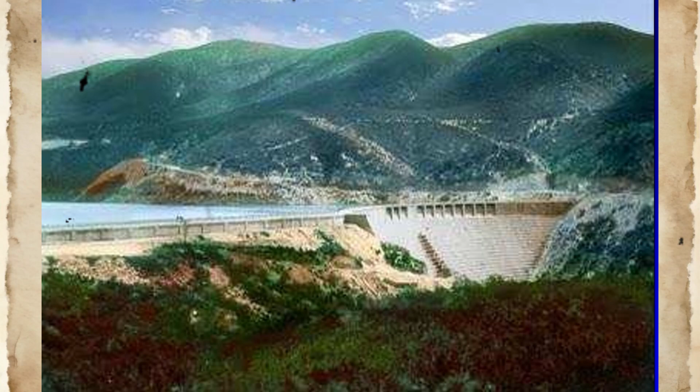The St. Francis Dam was conceived and executed within a specific institutional and technical context that shaped every subsequent decision. Between 1905 and 1913, the city of Los Angeles had constructed the Los Angeles Aqueduct, a 375-kilometer conveyance system designed to transport approximately 12 cubic meters per second of water from the Owens River drainage on the eastern slopes of the Sierra Nevada to the San Fernando Valley.

This system was designed, constructed, and administered by the Los Angeles Bureau of Waterworks and Aqueduct under the direction of William Mulholland, who served as chief engineer. Mulholland had begun his career in 1877 as a laborer maintaining water distribution canals and had risen through the organization without formal engineering education, relying instead on direct observation, technical reading, and accumulated operational experience. By 1924, Mulholland was recognized as the principal architect of Los Angeles's water infrastructure and wielded substantial autonomy in project conception, site selection, and design approval.

The St. Francis Dam was authorized as a storage facility to provide operational flexibility in the aqueduct system and to serve as a reserve supply during periods of peak demand or reduced inflow. The site selected was located in San Francisquito Canyon, a tributary valley to the Santa Clara River, approximately 64 kilometers northwest of downtown Los Angeles and 80 kilometers from the primary Van Norman Reservoir complex in the northern suburbs.

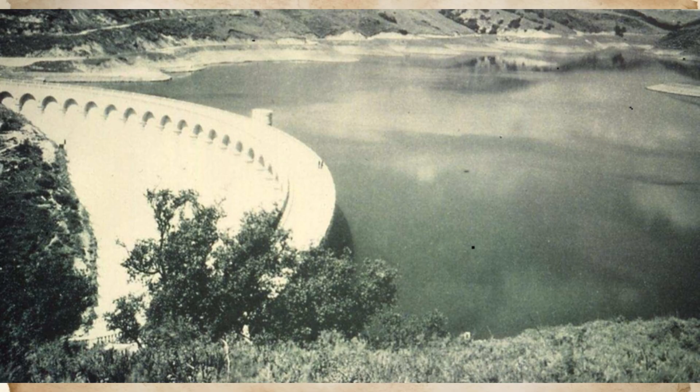Modern understanding of uplift pressure in dam foundations recognizes that hydrostatic pressure from an impounded reservoir can be transmitted through interconnected fractures, bedding planes, and cleavage surfaces in foundation rock, creating an upward force that reduces the effective weight of the dam and thereby reduces resistance to sliding and overturning.

By 1912, published literature on dam design had documented this phenomenon and had identified foundation drainage as a critical safeguard. The failure of the Austin Dam in Pennsylvania in 1911 had been attributed in part to inadequate control of uplift pressure. These precedents were apparently not incorporated into the design approach adopted for the St. Francis Dam.

The geology of the dam site was characterized by the presence of two distinct lithologic units. The western abutment and foundation consisted of the Vasquez conglomerate, a Paleogene sedimentary formation composed of poorly cemented cobbles and boulders in a matrix of clay-rich sand and silt. The eastern abutment and a portion of the central foundation consisted of the Pelona schist, a Cretaceous metamorphic rock characterized by well-developed foliation and pervasive micaceous mineralogy.

These two units were juxtaposed along the San Francisquito Fault, a northeast trending structure whose surface trace passed directly through the dam site beneath the western portion of the dam. The fault was marked by a zone of gouge and brecciated rock more than 1 meter wide, flanked by zones of intensely fractured and veined material.

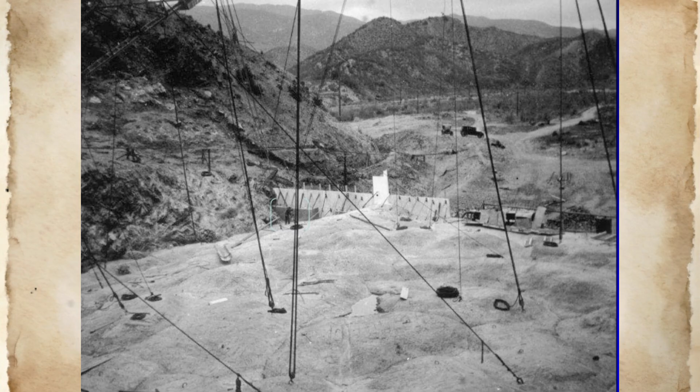The placement of a large concrete structure at the base of the slope, combined with saturation of foundation rock and introduction of hydrostatic pressure from an adjacent reservoir, constituted precisely such an alteration. The potential for reactivation of these latent slip surfaces was not evaluated prior to construction, as no detailed geological investigation of the site was conducted.

The design philosophy that guided construction of the St. Francis Dam was one of empirical precedent and conservative proportioning rather than rigorous analytical calculation. Mulholland and his design staff did not perform detailed stress analyses of the dam cross-section, load distribution on the foundation, or stability calculations incorporating realistic material properties and loading conditions.

The dam's geometry was instead based on visual similarity to the Hollywood Dam, adjusted for the greater height required at the St. Francis site. This approach was not unusual for the period, particularly for relatively small dams constructed under the authority of municipal agencies. However, it presupposed that site conditions at St. Francis would be comparable to those at Hollywood, an assumption that was not verified.

The absence of formal design calculations meant that there was no quantitative basis for assessing the adequacy of the dam's proportions, the significance of the height increase implemented during construction, or the sensitivity of stability margins to variations in foundation properties, uplift pressure, or material strength.

The institutional context in which the St. Francis Dam was designed and constructed was characterized by minimal external oversight. At the time of construction, California law exempted municipal water agencies from state-level review of dam design and construction. The Division of Water Rights, the state agency responsible for dam safety, had no jurisdiction over projects undertaken by cities or special districts.

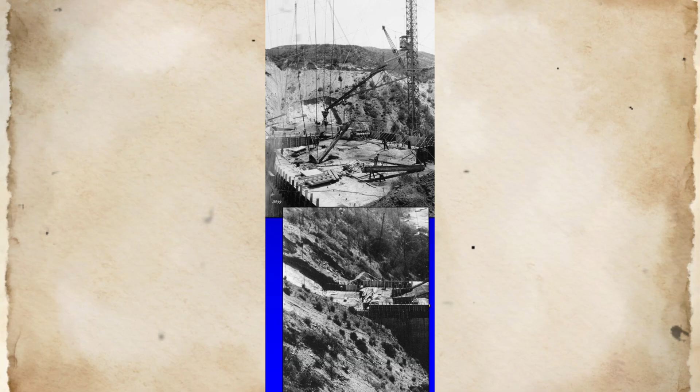Consequently, the St. Francis Dam was not subject to independent technical review by engineers or geologists outside the Los Angeles Bureau of Water Works and Aqueduct. There was no requirement for formal design documentation, no mandate for geological investigation, and no mechanism for third-party verification of construction quality or conformance to design intent.

Mulholland's authority within the Bureau was effectively absolute. The Board of Commissioners that governed the agency consisted of appointed officials with no technical training, who deferred to Mulholland's judgment on all engineering matters. This concentration of authority in a single individual, operating without formal accountability or technical review, created conditions in which judgments based on incomplete information, untested assumptions, or personal confidence could be implemented without challenge.

The operating philosophy for the reservoir once construction was complete was similarly informal. Responsibility for monitoring the dam's condition was assigned to a resident dam keeper, whose duties included visual inspection of the structure and observation of seepage flows. No formal inspection protocol was established, no quantitative criteria were defined for evaluating observed conditions, and no escalation procedure existed for anomalies that might warrant further investigation.

The assumption was that any significant distress in the dam or foundation would manifest as visually obvious cracking, deformation, or leakage that would be self-evident to an attentive observer. This assumption rested on the expectation that the dam and foundation would behave in a predictable manner consistent with the designer's conceptual model of the structure. It did not account for the possibility that observed conditions, such as seepage flows, minor cracking, or localized settlement, might be symptomatic of progressive failure mechanisms not anticipated in that conceptual model.

Reservoir filling commenced in March 1926, when aqueduct water was first diverted into the reservoir basin. The reservoir level rose gradually as water accumulated, with interruptions corresponding to periods of reduced aqueduct flow or increased downstream demand. During this period, vertical shrinkage cracks developed in the downstream face of the dam. Such cracks are common in mass concrete gravity dams, resulting from thermal contraction as the interior of the concrete mass cools following hydration of cement.

These cracks typically extend from the exposed surface into the dam, propagating along planes of least tensile resistance. In an unreinforced monolithic structure like the St. Francis Dam, such cracks would be expected to develop along approximately radial and vertical planes in the central valley section, and along inclined radial planes in the abutment sections. The presence of these cracks was noted during routine inspections, but was not regarded as indicative of structural distress. This interpretation was consistent with contemporary understanding of mass concrete behavior and was not unreasonable given the limited information available.

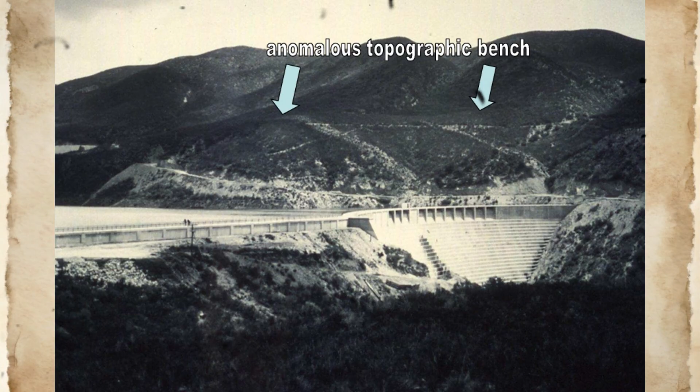By April 1926, the reservoir level had risen to the elevation of the fault trace where it crossed the foundation beneath the dam. Seepage was observed emerging from the western abutment in the vicinity of the fault outcrop. This seepage was attributed to flow through the fault gouge and adjacent fractured rock. The flow rate was estimated as modest and was judged to be within acceptable limits for a structure of this type. No corrective measures were undertaken.

Over the following months, various minor leaks were observed at different locations along the dam's downstream face and abutment contacts. These leaks exhibited variations in flow rate corresponding to changes in reservoir level and to seasonal temperature variations affecting concrete expansion and contraction.

None of the observed leakage flows were regarded as sufficiently anomalous to warrant detailed investigation or remedial action. The interpretation framework applied to these observations was one in which seepage through and beneath dams was expected, provided that flow rates remained stable and no significant erosion or piping was evident.

On March 7, 1928, the reservoir reached spillway elevation for the first time, achieving its maximum design storage capacity of approximately 38,000 acre-feet. In the week preceding this date, inspections had noted an increase in seepage flow from several locations in the western abutment. These flows were turbid, indicating that the percolating water was transporting fine-grained sediment.

Turbid seepage is a potential indicator of internal erosion or piping within the foundation or embankment material, a mechanism that can lead to progressive enlargement of seepage channels and eventual structural failure. However, in the context of the St. Francis Dam, a concrete structure founded on rock, rather than an earthfill embankment, turbidity was attributed to surface erosion of weathered rock or soil materials rather than subsurface piping. This interpretation was consistent with the expectation that seepage through rock foundations would follow discrete fractures or bedding planes, rather than developing self-enlarging erosion channels as in soil.

On the morning of March 12, 1928, the dam keeper discovered a new leak in the western abutment, discharging muddy water at an estimated rate of approximately 75 liters per second. He immediately notified Mulholland, who arrived at the site later that morning accompanied by Harvey Van Norman, his assistant. They inspected the leak and observed that the flow exhibited periodic surging, a pattern of alternating higher and lower discharge rather than steady flow.

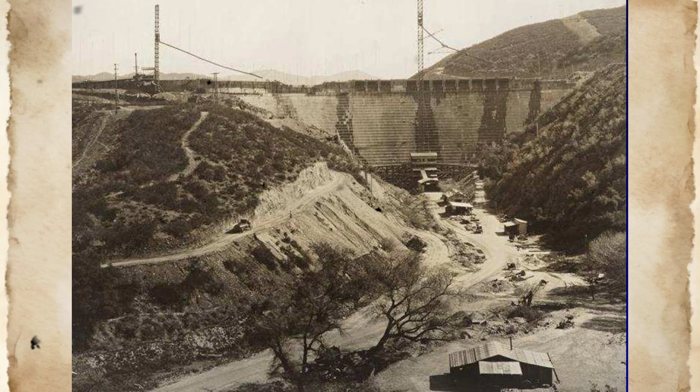The judgment rendered by Mulholland on the morning of March 12 was based on his interpretation of the observed conditions within the framework of his accumulated experience and his conceptual understanding of how the dam and foundation should behave. He had inspected numerous dams and water structures over his career and had developed intuitive criteria for distinguishing normal operational conditions from indicators of distress. The seepage flow observed on March 12, while larger and more turbid than previous flows, did not exceed the bounds of what Mulholland considered plausible for a structure of this type at full reservoir.

The surging of the flow, rather than being interpreted as evidence of subsurface erosion or structural movement, was rationalized as a transient hydraulic phenomenon. This interpretation was not implausible given the information available. However, it was predicated on the assumption that the foundation materials were behaving in a stable and predictable manner, an assumption that was, by that time, no longer valid.

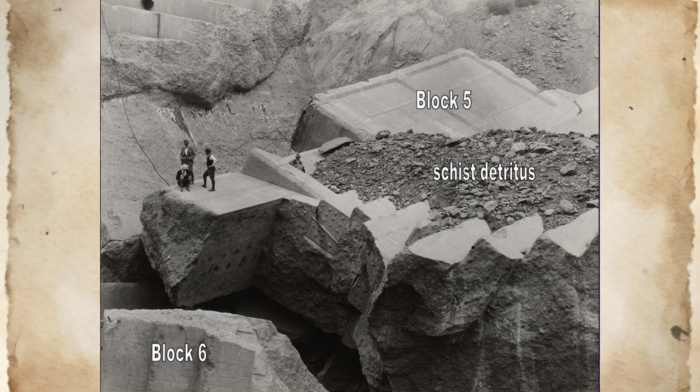At approximately 8:30 p.m. on March 12, a family driving on the canyon road that passed above the eastern abutment of the dam encountered a section of roadway that had subsided approximately 30 centimeters, creating a distinct step across the road width. The road at this location was situated approximately 30 meters upstream of the dam crest, on a slope composed of Pelona schist. The subsidence indicated that a portion of the hillside had moved downward and outward toward the reservoir. This movement was consistent with incipient landsliding along foliation planes within the schist, driven by reduced shear resistance due to elevated pore pressures in the rock mass.

The family did not immediately report the road damage, and news of the incident did not reach dam operating personnel until after the dam had failed. However, the timing of the observed subsidence, approximately 3 hours before the final collapse, indicates that large-scale deformation of the eastern abutment was already underway by early evening on March 12.

The St. Francis Dam failed at 11:57:30 p.m. on March 12, 1928. The precise timing is established by the recorded failure of an electrical transmission line supported on the eastern abutment, which caused a logged interruption at a downstream substation. Within seconds of this initial failure, the dam underwent progressive collapse in which the eastern and western wings of the structure were displaced downstream and destroyed, while a central section of the dam, subsequently termed the tombstone, remained standing. The failure released the entire reservoir volume in a period estimated at 70 minutes, generating a flood wave that propagated downstream through San Francisquito Canyon, into the Santa Clara River Valley, and ultimately to the Pacific Ocean.

The flood caused extensive destruction of infrastructure and agricultural land and resulted in at least 432 confirmed fatalities, with some estimates suggesting a higher toll. The failure of the St. Francis Dam constituted the deadliest civil engineering disaster in 20th century United States history and precipitated immediate scrutiny of the design, construction, and operational practices that had permitted such a catastrophic failure to occur.

The question that must be addressed in any forensic analysis of this failure is not merely what physical processes caused the dam to collapse, but why those processes were not anticipated, why warning signs were not interpreted correctly, and why the design and institutional framework permitted a structure of this type to be constructed and operated at this site.

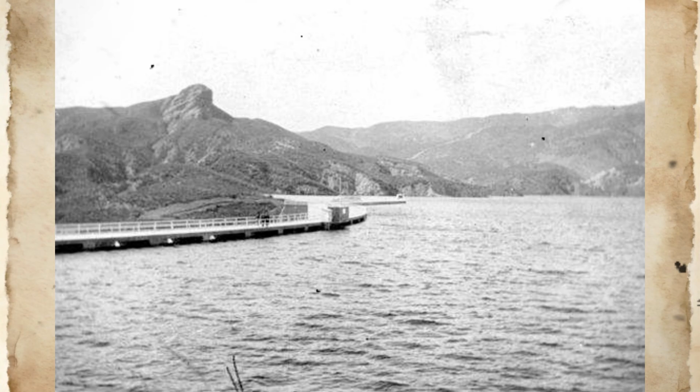Understanding these latent conditions requires examining not only the physical characteristics of the dam and its foundation, but also the cognitive frameworks, institutional norms, and professional practices that shaped how information was gathered, interpreted, and acted upon. The most fundamental latent condition was the absence of comprehensive geological investigation prior to site selection and design.

Standard practice in dam engineering, even in the 1920s, recognized that foundation geology constituted the primary determinant of site suitability, and that surface observations alone were insufficient to characterize subsurface conditions. Exploratory drilling, test pits, and detailed mapping of bedrock lithology, structure, and discontinuities were understood to be essential for evaluating bearing capacity, permeability, and potential failure modes.

However, no such investigation was conducted at the St. Francis site. The decision to construct the dam at this location was based on topographic convenience, the presence of a natural valley constriction suitable for a dam, proximity to the aqueduct alignment, and absence of existing development that would require land acquisition or relocation. Geological suitability was assessed only through visual inspection of surface exposures during site clearing operations.

This approach reflected a broader pattern in Mulholland's professional practice. His career had been built on pragmatic problem-solving and empirical judgment rather than formal analytical methods. He had successfully designed and constructed the Los Angeles Aqueduct, a project of considerable technical complexity, without formal engineering education and without reliance on outside consultants. This success reinforced a belief that direct observation, accumulated experience, and sound practical judgment were sufficient for making engineering decisions.

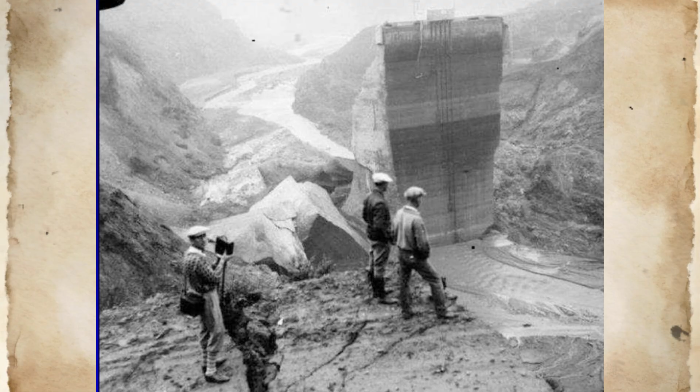A 1911 report prepared by the Bureau's own staff during route selection for the Los Angeles Aqueduct had explicitly identified the Pelona schist along the eastern wall of San Francisquito Canyon as unstable fractured material that should be avoided. This report was filed within the Bureau's records, but was apparently not consulted when the dam site was selected 13 years later. The omission is significant not because the earlier report specifically addressed the dam site, it did not, but because it demonstrates that relevant geological information existed within the organization's institutional memory and was not retrieved or applied when needed.

The presence of the San Francisquito Fault beneath the dam site was similarly documented in publicly available geological maps but was not incorporated into site evaluation. The fault had been mapped by the United States Geological Survey and was shown on regional geological compilations available prior to 1924.

Consultation of these maps during site selection would have revealed the fault's presence and should have prompted further investigation of fault zone characteristics, potential for seismic activity, and implications for foundation, permeability, and stability. However, geological maps were not routinely consulted by civil engineers in municipal water agencies during this period, particularly when those engineers lacked formal training in geology.

The conceptual framework within which Mulholland operated did not include geological structure as a primary design consideration. His focus was on topography, hydraulics, and concrete proportioning, domains in which he had extensive practical knowledge. Geology was regarded as a secondary concern, relevant primarily to the extent that obviously unsuitable materials such as loose soil or heavily weathered rock could be identified and excavated.

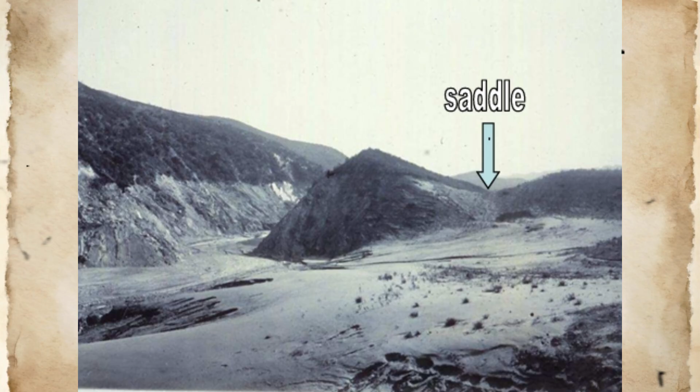When the inclined components of stress, due to the dam's geometry, and the lateral thrust from arch action are included, the total stress magnitude in the foundation approached or exceeded the material's strength capacity. Progressive yielding of the conglomerate beneath the dam would produce differential settlement, with greatest deformation occurring where stresses were highest, specifically in the upper portions of the western abutment, where the dam was tallest and where the conglomerate thickness was greatest. This differential settlement would induce additional stresses in the dam structure itself.

A monolithic concrete dam founded on yielding material experiences internal tensile stresses as different portions of the structure settle by different amounts. These tensile stresses would be concentrated in regions where settlement gradients were steepest, typically at the boundaries between competent and incompetent foundation materials or at geometric discontinuities in the structure. In the case of the St. Francis Dam, such boundaries existed at the contact between conglomerate and schist near the center of the dam and at the transition between the main dam and the western wing wall.

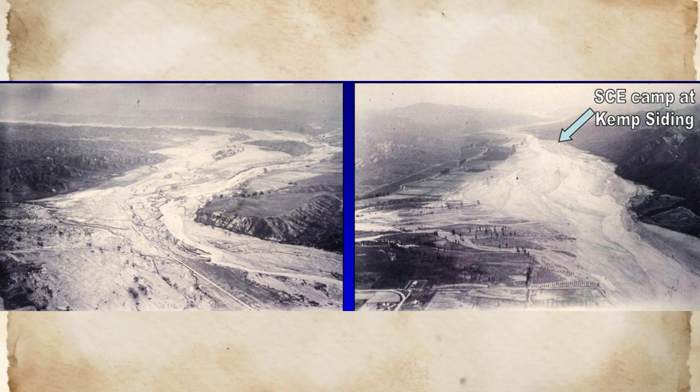In the absence of a deep cut-off wall or grout curtain to impede flow, and in the absence of relief wells or drainage galleries to dissipate pressure, the uplift pressure distribution beneath a dam may approach the full hydrostatic head of the reservoir. The mechanical consequence of uplift pressure is a reduction in the effective weight of the dam, which in turn reduces resistance to sliding and overturning. The factor of safety against sliding, defined as the ratio of resisting forces to driving forces, is directly proportional to the effective normal force acting on the foundation contact. If uplift pressure increases, the effective normal force decreases, and the factor of safety decreases correspondingly.

For the St. Francis Dam, the absence of foundation drainage beneath the eastern and western abutments meant that uplift pressure in these regions could develop to magnitudes comparable to the reservoir head. Mulholland's statement that he considered drainage unnecessary where bedrock appeared homogeneous indicates that he did not recognize the significance of uplift pressure in fractured or foliated rock masses. This judgment was inconsistent with contemporary engineering literature and with the documented experience of other dam failures attributed to uplift.

The eastern abutment presented a distinct set of latent conditions related to the orientation and mechanical properties of the Pelona schist. The schist's foliation dipped out of the hillside at angles between 30 and 50 degrees, creating planes of weakness that were approximately parallel to the slope surface.

The shear strength available along these foliation planes was controlled by friction and by the limited cohesion provided by intact rock bridges between discontinuities. Under natural conditions, with no external loading, and with groundwater levels relatively deep due to the semi-arid climate, the hillside was stable.

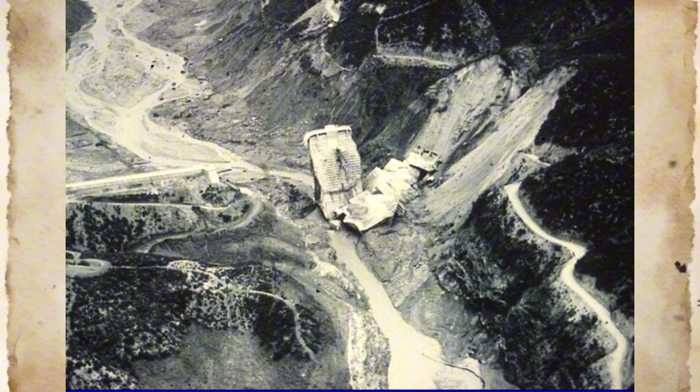Geological investigation conducted after the dam failure identified multiple relict slip surfaces within the eastern abutment, indicating that prehistoric landslides had occurred in this location. The morphology of these features suggested that they were deep-seated rotational or translational slides that had moved along foliation planes and had subsequently stabilized under natural conditions. The presence of these features was not unique to the St. Francis site. Similar ancient landslides were identified along much of the eastern slope of San Francisquito Canyon during post-failure reconnaissance.

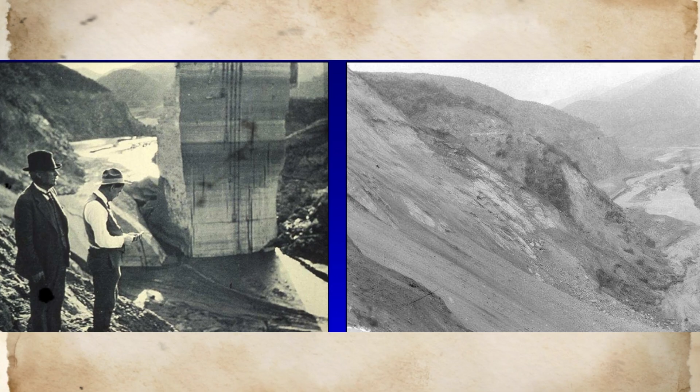However, their presence at the dam site was significant because it indicated that the hillside was inherently susceptible to renewed movement if the factors controlling stability, effective stress, pore pressure, external loading were altered. The placement of a large concrete structure at the toe of the slope, combined with saturation from an adjacent reservoir, constituted precisely such an alteration.

The design of the St. Francis Dam did not incorporate any factor of safety margin to account for uncertainty in material properties, loading conditions, or construction quality. The dam's proportions were based on empirical precedent rather than analytical calculation, and no formal stability analysis was performed to verify adequacy under credible loading scenarios. This absence of quantitative analysis meant that there was no documented basis for the dam's safety margins or lack thereof.

Contemporary practice in dam engineering recognized that factors of safety should be explicitly calculated and should exceed minimum threshold values to account for uncertainties and potential deviations from design assumptions. Typical minimum factors of safety for gravity dams were 2 against sliding and 1.5 against overturning, based on assumed loading conditions that included full reservoir, uplift pressure, and earthquake forces where applicable. Whether the St. Francis Dam met these criteria could not be determined without analysis, and no such analysis was performed.

The increase in dam height implemented during construction further reduced whatever safety margins may have existed in the original design. Raising the crest by 6 meters increased the reservoir storage capacity and the hydrostatic force acting on the dam, but did not increase the dam's base width or otherwise enhance its resistance to sliding or overturning. The effect was to increase the driving forces while leaving the resisting forces unchanged, thereby decreasing the factor of safety. If the original design had been marginally adequate, the modified design would be inadequate. If the original design had included appropriate safety margins, those margins would be partially consumed by the modification.

The decision to increase the dam height without corresponding structural adjustments reflects either an implicit assumption that the original design had been highly conservative, an assumption that could not be verified without calculation, or an insufficient appreciation of how changes in geometry affect structural stability.

Photographic evidence from the construction period, analyzed after the failure, suggested that the actual extent of the dam's downstream toe may have been less than the design dimension. If the concrete pour did not extend to the intended limits, the effective base width of the dam would be reduced, further compromising stability. This discrepancy, if real, would represent a construction deficiency that should have been identified through survey and quality control procedures. However, the Bureau's construction practices during this period did not emphasize formal documentation or independent inspection.

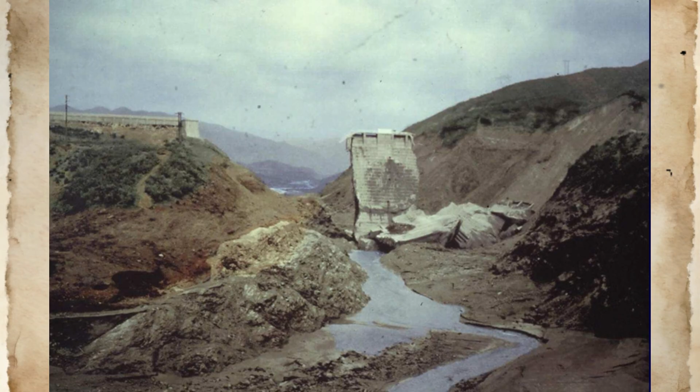Responsibility for verifying conformance to design rested primarily with the resident construction supervisor, who reported directly to Mulholland. There was no independent quality assurance function within the organization and no external oversight by state or federal agencies. Under these conditions, deviations from design could occur without detection or correction.

The dam's monolithic construction without contraction joints or other provisions for accommodating differential movement created a structural system with limited redundancy and no capacity for stress redistribution. In a jointed dam, individual blocks can move slightly relative to one another in response to foundation settlement or thermal expansion, without inducing large tensile stresses in the concrete. Joints also provide known planes of weakness that can accommodate cracking in a controlled manner. In a monolithic dam, all deformations must be absorbed by the concrete itself, and cracks develop along planes of least resistance determined by local stress concentrations, material heterogeneities, and thermal gradients.

Once formed, these cracks cannot close completely even if external loads are removed, because rough crack surfaces interlock and because some irreversible deformation occurs in the surrounding concrete. The result is a structure that, while appearing intact from external observation, consists internally of multiple blocks separated by partial or complete fractures. The mechanical behavior of such a structure under load is fundamentally different from that of a true monolith. But this difference is difficult to quantify without detailed knowledge of crack locations, orientations, and degrees of separation.

The alarm system and monitoring protocols in place at the St. Francis Dam were minimal. The dam keeper was responsible for daily visual inspection of the structure and for noting any unusual conditions such as new cracks, changes in seepage flow, or structural deformation. However, there were no instruments installed to measure concrete strain, foundation movement, seepage quantity, or uplift pressure. The dam keeper had no technical training in structural engineering or dam safety and had no formal criteria for evaluating whether observed conditions were within acceptable limits.

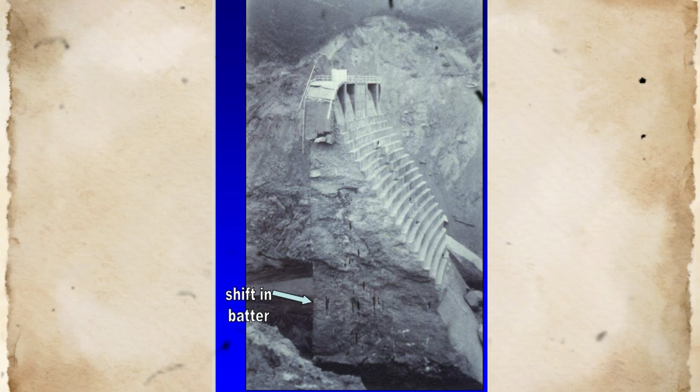This regulatory gap was not unique to California. Similar exemptions existed in other states and reflected a broader assumption that governmental agencies could be trusted to self-regulate. The St. Francis failure demonstrated the fallacy of this assumption and prompted immediate legislative changes to eliminate such exemptions. The training and professional development of dam operators and inspection personnel during this period did not emphasize recognition of incipient failure modes or interpretation of warning signs. The dam keeper at St.

Francis had operational responsibilities but no formal education in civil engineering, structural mechanics, or dam safety. His understanding of what constituted normal versus abnormal behavior was based on informal guidance from supervisors and on his own observations over time. This knowledge was largely qualitative and comparative. A condition was judged normal if it resembled conditions previously observed, and abnormal if it represented a significant departure.

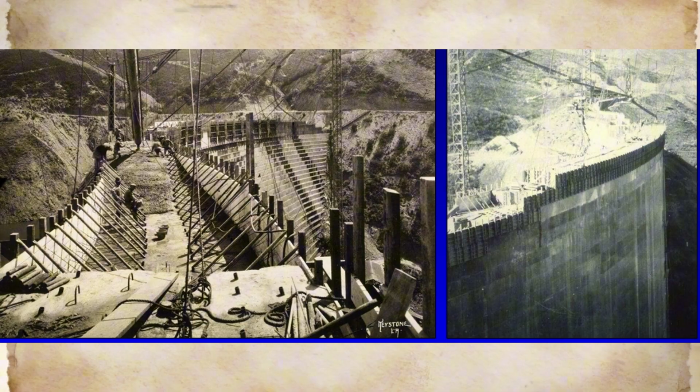However, this approach provided no framework for recognizing progressive deterioration or for distinguishing between benign variations and indicators of impending failure. The dam keeper's observation of muddy seepage and surging flow on the morning of March 12 was reported to Mulholland, but neither the dam keeper nor Mulholland interpreted these signs as indicators of imminent structural collapse. The interpretive framework available to them did not include a mental model of how subsurface erosion in weak conglomerate or progressive landslide movement in foliated schist might manifest at the surface.

The concept of progressive failure, wherein a structure or foundation gradually loses strength or stability through a sequence of incremental damage events, was not well developed in dam engineering practice of the 1920s. Failures were generally conceptualized as resulting from overload, a flood exceeding spillway capacity, an earthquake exceeding design seismic resistance, or a sudden foundation collapse due to previously undetected voids.

The possibility that a dam could fail under normal operating conditions due to gradual deterioration of foundation material or cumulative loss of structural integrity was less widely recognized. This conceptual gap meant that warning signs of progressive failure, such as increasing seepage, turbidity, or localized deformation, might be rationalized as transient anomalies rather than interpreted as evidence of an ongoing failure process.

The physical configuration of the dam site itself contributed to the latent failure conditions. The narrowness of the valley and the presence of the natural spur on the western side created a geometrically constrained site in which the dam had to accommodate significant variations in foundation elevation and material properties over a relatively short horizontal distance. The central portion of the dam rested on schist at relatively low elevation, while the western wing extended up the conglomerate slope to maintain a continuous crest.

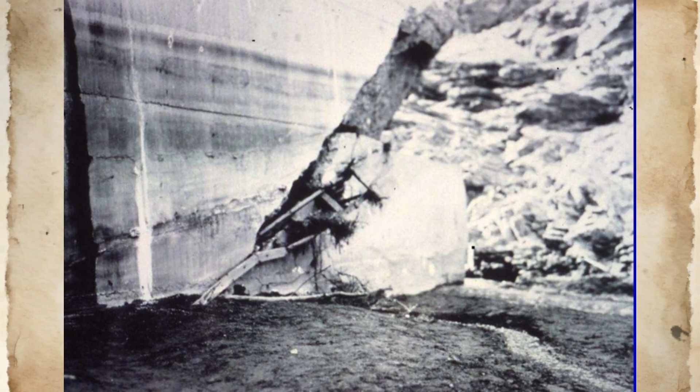The decision to construct a concrete gravity dam rather than an alternative design such as an earth or rockfill embankment reflected a preference for concrete construction that was widespread in the early 20th century. Concrete dams were perceived as more permanent, more controllable during construction, and less susceptible to erosion or piping than earthfill dams. However, concrete dams impose much higher bearing stresses on foundation materials than embankment dams of equivalent height, and they are less tolerant of foundation deformation.

An earthfill dam can accommodate moderate differential settlement through internal adjustment of the fill material, whereas a concrete dam subjected to differential settlement develops cracks and internal stress concentrations. For a site with weak or variable foundation conditions, an embankment design might have been more appropriate. The choice of a concrete gravity design presupposed that the foundation was competent and uniform, an assumption that was not verified at St. Francis.

The schedule pressures and resource constraints under which the dam was designed and constructed also constituted latent conditions. The Los Angeles water system was under continuous demand for expansion to serve the city's rapidly growing population. New storage capacity was needed urgently, and delays in project delivery were viewed as impediments to the city's economic development. This urgency created an organizational bias toward rapid decision-making and abbreviated planning processes. Comprehensive site investigation, detailed design analysis, and extended construction schedules were seen as costly and time-consuming.

The institutional incentive structure rewarded timely project completion and cost control rather than thoroughness of design or conservatism of safety margins. Under these conditions, decisions tended to favor expedience over exhaustive analysis, and judgments were made with less information than would be ideal, but with sufficient information to appear reasonable at the time.

The cumulative effect of these latent conditions was to create a socio-technical system in which failure was not inevitable in the deterministic sense, but was highly probable given the combination of weak foundation materials, inadequate design provisions, absence of external review, concentration of decision authority, and limited capacity for detecting and interpreting warning signs. No single condition was sufficient to cause failure. The conglomerate alone, or the schist alone, or the fault alone, or the inadequate drainage alone, might have been manageable if other aspects of the design and oversight system had been robust.

However, when multiple latent conditions align, when weak materials coincide with inadequate analysis, when organizational culture discourages critical review, when regulatory oversight is absent, and when warning signs are misinterpreted, the probability of catastrophic failure increases dramatically. The St. Francis Dam was a system configured for failure, awaiting only the final triggering conditions that would convert latent

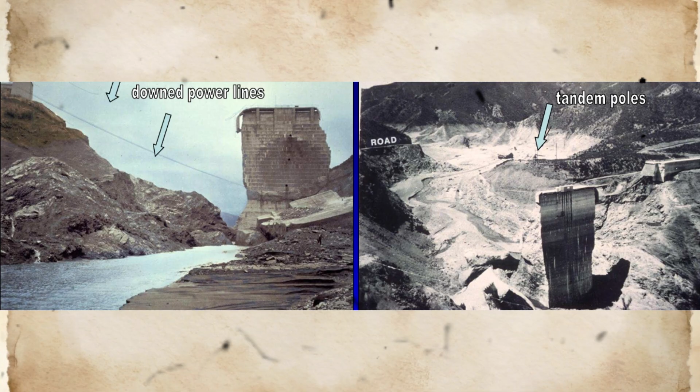vulnerability into manifest collapse. The transformation of latent vulnerability into active failure began not with a single catastrophic rupture, but through a sequence of progressive deterioration events that unfolded over days and hours preceding the final collapse. Understanding this progression requires reconstructing the state of the dam and foundation as the reservoir approached and reached its maximum designed capacity, identifying the physical processes that were initiated by full impoundment, and examining how these processes were interpreted or misinterpreted by those responsible for monitoring the structure.

The critical analytical challenge is to distinguish between what was observable at the time and what could be inferred from those observations given the conceptual frameworks and technical knowledge available to the observers. By March 7, 1928, the reservoir level had risen to spillway elevation for the first time since filling operations began in 1926. The reservoir now contained approximately 38,000 acre-feet of water, equivalent to a volume of roughly 47 million cubic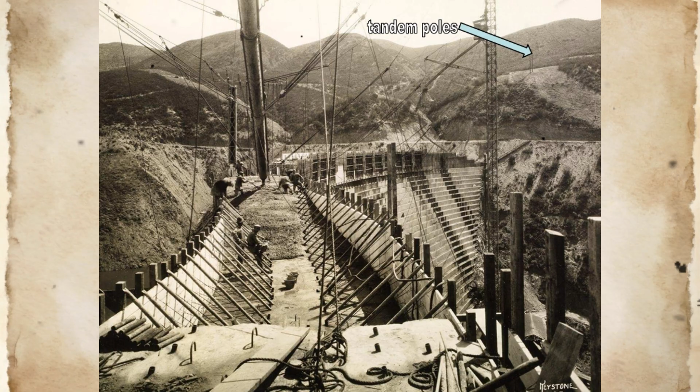This force was resisted by the dam's self-weight, by shear resistance along the foundation contact, and by any arch thrust that could be developed through bearing against the abutments. The attainment of full reservoir capacity marked a transition in the hydraulic and mechanical state of the foundation. Prior to this point, water infiltration into foundation rock had been limited to elevations below the instantaneous reservoir level, with the upper portions of the abutments remaining unsaturated.

With the reservoir at spillway level, water was now in direct contact with foundation rock across the full height of the dam, and hydrostatic pressure was being transmitted into fractures, bedding planes, and foliation surfaces throughout the foundation volume. The rate at which pore pressures within the foundation equilibrated with reservoir pressure depended on the permeability of the rock mass and on the connectivity of flow paths. For highly fractured or foliated rock with interconnected discontinuities, equilibration could occur within hours to days. For less permeable rock with isolated fractures, equilibration might require weeks to months.

The Pelona schist forming the eastern abutment and portion of the central foundation possessed moderate permeability along foliation planes and cross-cutting fractures, but low permeability across intact rock matrix. The foliation orientation dipping into the hillside at 30 to 50 degrees provided preferential flow paths that were approximately parallel to the slope surface. Water entering these foliation planes from the reservoir would migrate along the planes into the hillside, creating elevated pore pressures at depth.

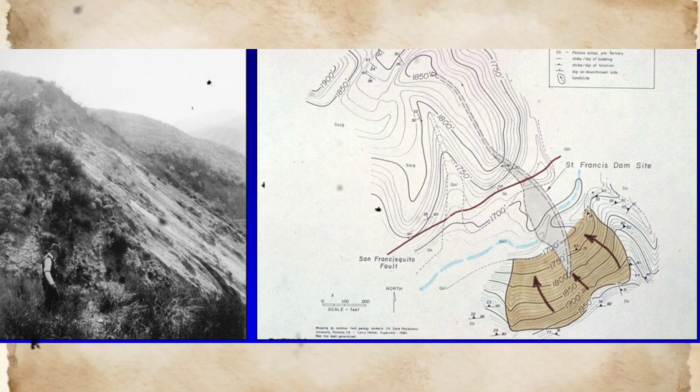The magnitude of pore pressure at any given point would depend on the hydraulic gradient between that point and the reservoir, and on the resistance to flow along the intervening path. In regions where foliation planes were continuous and open, pore pressures could approach the full hydrostatic head corresponding to the elevation difference between the reservoir surface and the point of interest. In regions where flow paths were constricted or discontinuous, pore pressures would be lower. The mechanical consequence of elevated pore pressure within the schist was a reduction in effective normal stress acting across foliation planes and other potential sliding surfaces.

Effective stress, defined as total stress minus pore pressure, controls the frictional resistance available to resist shearing. As pore pressure increases, effective stress decreases, and shear strength decreases proportionally. For a hillside that was marginally stable under natural conditions, the introduction of elevated pore pressures due to reservoir filling could reduce the factor of safety below unity, initiating slope movement. This movement would not necessarily be instantaneous or catastrophic. It could occur as slow creep or as episodic incremental displacements, particularly if the sliding mass encountered irregularities or intact rock bridges along the slip surface that temporarily arrested motion.

Evidence of such movement was documented on the evening of March 12 when the Sylve family encountered the broken roadway on the eastern abutment. The road's subsidence of approximately 30 centimeters indicated downward and outward displacement of a block of hillside schist. The location of this displacement, approximately 30 meters upstream of the dam crest, suggests that the sliding mass extended from near the reservoir shoreline down to the base of the dam or below.

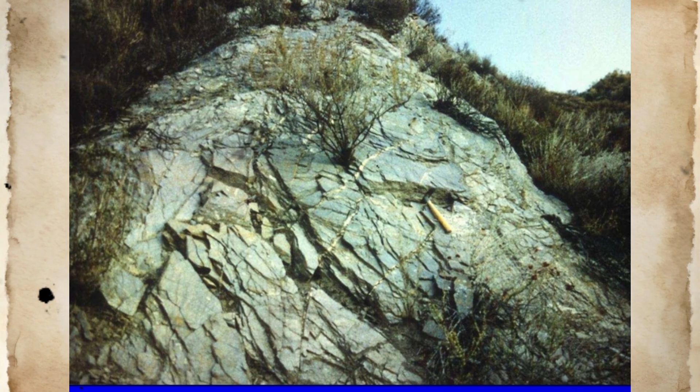The timing of the observed displacement, approximately 3 hours before the final collapse, indicates that large-scale deformation of the eastern abutment was actively underway by early evening on March 12. However, because this observation was not reported to dam operating personnel until after the failure had occurred, it did not influence real-time decision-making.

The Vasquez conglomerate forming the western abutment and foundation exhibited very different behavior under reservoir loading. The conglomerate's clay-rich matrix absorbed water readily, leading to swelling and progressive loss of strength. Gypsum veins within the conglomerate dissolved upon prolonged contact with percolating water, creating enlarged seepage paths and reducing the material's cohesion. The combined effects of saturation, swelling, and dissolution resulted in a gradual reduction in bearing capacity and an increase in deformability. Under the compressive stresses imposed by the dam, the saturated conglomerate underwent creep, time-dependent deformation at constant stress, and localized compression where stress concentrations were highest.

Seepage through the conglomerate had been observed from early in the reservoir filling process. Initial seepage flows were clear, indicating that water was moving through existing voids or fractures without mobilizing fine particles. As saturation progressed and the conglomerate matrix began to soften, seepage flows became turbid, indicating that fine-grained material was being transported in suspension. Turbidity in seepage is a recognized warning sign in dam safety because it indicates internal erosion, the progressive removal of material from within the structure or foundation.

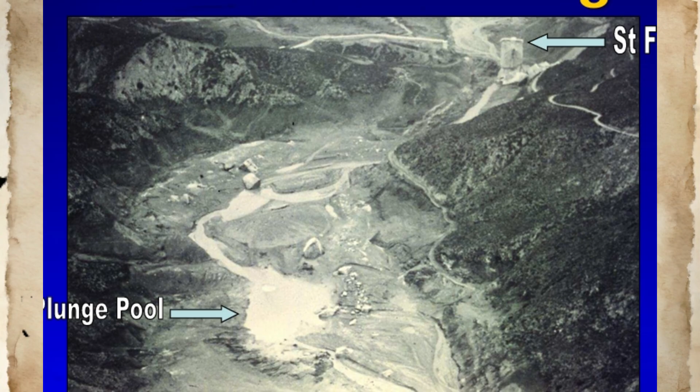If internal erosion continues unchecked, it can create enlarged flow channels that further accelerate erosion, eventually producing cavities or pipes that undermine structural support. However, the significance of turbidity depends on the context. In an earthfill embankment dam, turbid seepage is an immediate concern because it indicates active piping in the dam body or foundation. In a concrete dam founded on rock, turbidity was more commonly attributed to surface erosion of weathered rock or mobilization of sediment from pockets of loose material exposed during excavation.

During the week preceding March 12, multiple seepage flows were observed in the western abutment, several of which exhibited turbidity. These flows were reported to Mulholland and Van Norman, who inspected the dam on several occasions. Their interpretation was that the turbid water was likely draining from superficial materials or from seams of weathered conglomerate exposed on the downstream slope.

This interpretation was consistent with the expectation that the conglomerate, while weak, was not undergoing catastrophic internal erosion. It was also consistent with the broader assumption that the foundation, having been exposed during site clearing and visually inspected prior to concrete placement, was adequate to support the dam under design loading. The possibility that subsurface erosion was actively enlarging flow paths within the conglomerate, and that this process was progressively weakening the foundation, was not considered as a likely mechanism.

On the morning of March 12, the dam keeper discovered a new leak emerging from the western abutment. This leak was larger than previously observed seepage flows and was discharging visibly muddy water. The estimated flow rate of 75 liters per second, if accurate, represented a significant volume of seepage and implied the existence of a well-developed subsurface flow path with relatively high permeability. More concerning was the periodic surging of the flow, alternating periods of higher and lower discharge rather than steady flow.

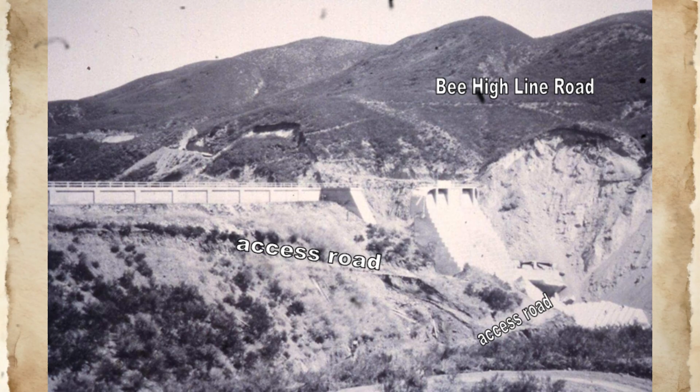The decision not to take immediate action in response to the March 12 observations, specifically, the decision not to lower the reservoir level as a precautionary measure, reflected a judgment that the risk of imminent failure was low. Lowering the reservoir would have required releasing water through the outlet works, reducing storage available for downstream delivery, and potentially creating operational difficulties if the reservoir could not be refilled promptly. These considerations were weighed against the perceived urgency of the observed conditions.

In Mulholland's assessment, the conditions warranted monitoring and future remedial work, but did not justify immediate emergency drawdown. This judgment was communicated to the dam keeper, who was instructed to continue normal operations and to report any further changes. Between noon on March 12 and the time of final collapse at approximately midnight, the physical processes that had been underway in the foundation continued and accelerated.

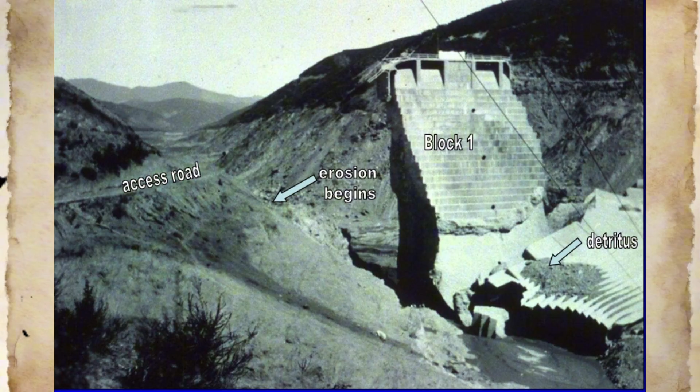Subsurface erosion within the conglomerate continued to enlarge flow paths and to remove support from beneath the western portion of the dam. Pore pressures within the schist of the eastern abutment continued to reduce effective stresses along foliation planes, bringing the hillside closer to or beyond the threshold of stability. The weight of the dam and the hydrostatic pressure of the reservoir continued to impose stresses on foundation materials that were progressively losing strength. At some point during this period, the balance of forces transitioned from a marginally stable configuration to an actively unstable configuration in which failure became inevitable.

The precise sequence of events during the hours immediately preceding collapse cannot be reconstructed with certainty because no witnesses observed the dam continuously during this period, and no instrumentation recorded the progression of failure. However, physical evidence examined after the failure, combined with analysis of failure mechanics, allows reconstruction of the probable sequence. The eastern abutment, already experiencing progressive landslide movement as evidenced by the road subsidence observed at 8:30 p.m., continued to deform under the combined effects of reduced shear resistance along foliation planes and increased loading from the reservoir.

This deformation may have been accelerating as the slope approached or exceeded the critical state for kinematic instability. Simultaneously, the western abutment was experiencing progressive yielding of the saturated conglomerate foundation, where the dam was tallest and the conglomerate thickness was greatest. Bearing stresses exceeded the material's saturated compressive strength, producing incremental settlement.

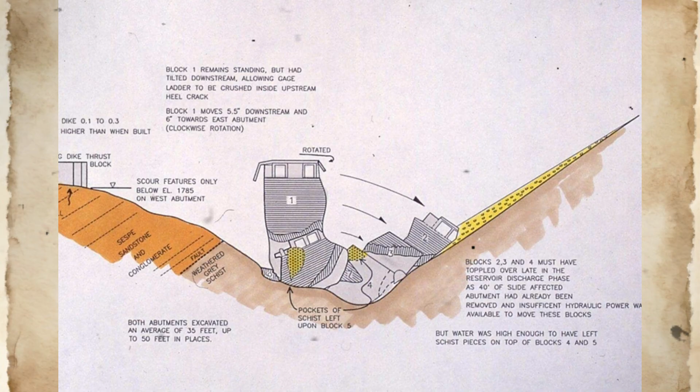This settlement was not uniform, but was concentrated in zones where the conglomerate was weakest, or where stress concentrations were highest. Differential settlement between adjacent portions of the dam would have induced tensile stresses in the concrete, potentially propagating existing shrinkage cracks or opening new fractures. As the integrity of the dam structure was progressively compromised by cracking, its ability to distribute loads and to resist deformation decreased.

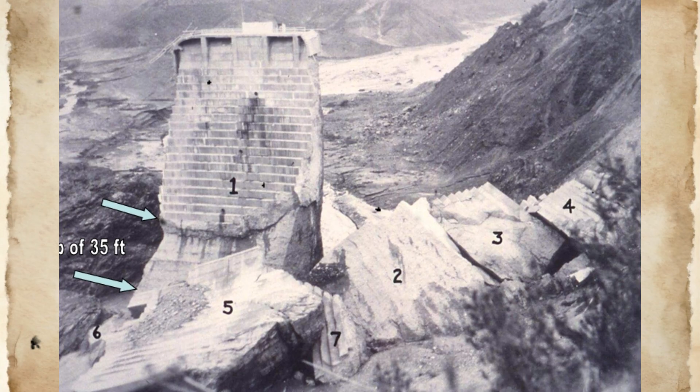The interaction between these two deteriorating conditions, progressive landslide movement on the east and progressive foundation yielding on the west, created a mechanically coupled system in which deformation in one location altered stress distributions in adjacent regions. As the eastern abutment moved outward and downward, support was removed from the eastern portion of the dam.

The dam structure, no longer fully restrained on the eastern side, experienced increased cantilever deflection and increased arch thrust toward the western abutment. This increased thrust, transmitted through the already cracked concrete, imposed additional loading on the western foundation, accelerating yielding and settlement. The result was a positive feedback loop. Deformation begat additional stress redistribution, which begat additional deformation.

At approximately 11:57:30 p.m. on March 12, this deterioration process reached a critical threshold. The precise trigger for final collapse, whether it was catastrophic failure of the eastern abutment landslide, sudden rupture of the dam structure along a major crack, or a combination of mechanisms, cannot be determined definitively. However, the evidence indicates that failure initiated in the eastern abutment.

The electrical transmission line supported on the eastern hillside above the dam failed at 11:57:30 p.m., as recorded by instrumentation at a downstream substation. This timing corresponds to the moment of initial major structural displacement. The failure of the transmission line indicates that the hillside was undergoing large-scale rapid movement, either as acceleration of the existing slow landslide or as sudden catastrophic collapse of the slope.

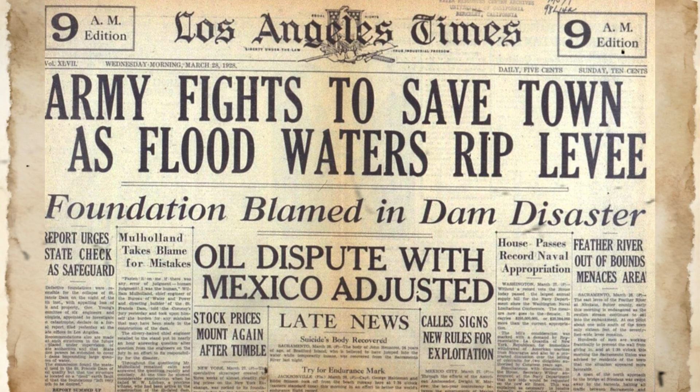The removal of support from the eastern end of the dam by the landslide would have immediately destabilized the eastern wing of the dam structure. The concrete blocks forming this section, no longer restrained by the adjacent hillside and subjected to full hydrostatic pressure from the reservoir, would have been thrust outward and downstream.

The loss of the eastern wing would have created a breach in the dam, allowing reservoir water to begin flowing out at high velocity. This outflow would have rapidly eroded the landslide debris and exposed foundation material at the base of the breach. However, the outflow at this stage would have been limited to the width of the breach and would have been constricted by the remaining central and western portions of the dam.

The central portion of the dam, the section that ultimately survived as the tombstone, was founded on schist at a lower elevation than the abutment sections and was provided with foundation drainage in the form of relief wells. This drainage, while limited, was apparently sufficient to control uplift pressures beneath this section to a degree adequate to maintain stability. However, the sudden removal of lateral support from the eastern side, combined with the dynamic loading from the initial outflow, subjected the tombstone section to forces for which it had not been designed.

Survey measurements conducted after the failure determined that the top of the tombstone had moved approximately 15 centimeters in a radial direction and a similar distance in an easterly tangential direction. These displacements indicate that the tombstone experienced both rotation and lateral translation during the failure sequence, but retained sufficient structural integrity and foundation support to avoid complete collapse.

Approximately 20 minutes after the initial failure of the eastern wing, based on analysis of flood wave timing and reservoir drainage rates, the western wing of the dam collapsed. This secondary collapse was likely triggered by a combination of mechanisms: increased downstream thrust from the partial breach flow, loss of confining stress from the now displaced central section, and final loss of bearing support as the saturated conglomerate yielded under increased loading. The collapse of the western wing created a second major breach, allowing reservoir water to discharge through both the eastern and western openings simultaneously.

The combined outflow capacity through these breaches was enormous, estimated at peak rates exceeding 500,000 cubic feet per second, equivalent to approximately 14,000 cubic meters per second. This flow rate is comparable to the peak discharge of the Mississippi River during major floods and far exceeds the outflow capacity of the dam's outlet works or spillway.

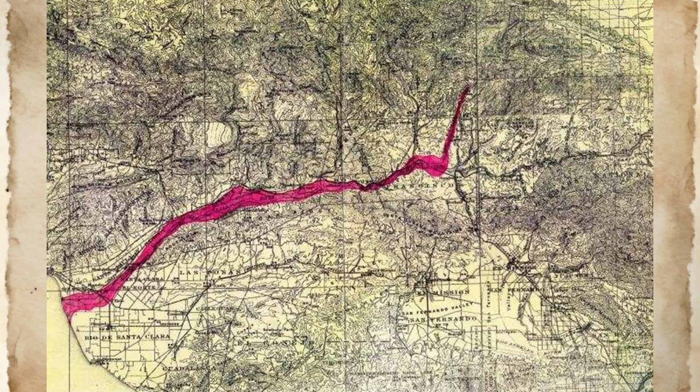The reservoir level dropped rapidly as this outflow continued, falling at rates exceeding 1 meter per minute during the peak discharge period. Within approximately 70 minutes of the initial failure, the reservoir had drained almost completely, leaving only residual pools in low-lying areas of the former reservoir basin.

The flood wave generated by this sudden release of water propagated downstream through San Francisquito Canyon at velocities estimated at 25 to 30 kilometers per hour. The wave height in the narrow upper canyon reached approximately 40 meters, measured from pre-flood ground surface to the peak water surface elevation indicated by scour marks and debris deposition on canyon walls.

As the wave advanced downstream and the valley widened, wave height decreased and wave width increased, with a total volume of water spreading laterally across the available floodplain. Witnesses in the town of Castaic, located approximately 8 kilometers downstream of the dam, reported hearing a rumbling sound beginning at approximately 12:45 a.m. on March 13th, followed shortly by the arrival of the flood wave, which destroyed most structures in the town.

Telephone warnings were successfully transmitted to communities further downstream, including Fillmore and Santa Paula, allowing many residents to evacuate to high ground before the flood wave arrived. In Fillmore, the wave arrived at approximately 3 a.m., and in Santa Paula at approximately 3:20 a.m. By this time, the wave had attenuated considerably due to spreading and energy dissipation, but it was still sufficient to cause extensive destruction of structures and infrastructure in the low-lying areas adjacent to the Santa Clara River.

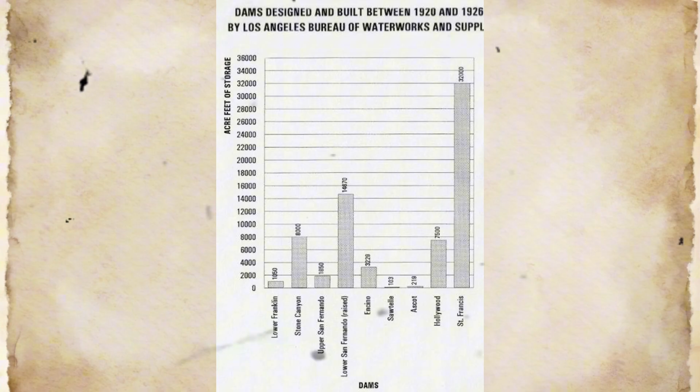The floodwave reached the Pacific Ocean at approximately 5:30 a.m., some 5 hours after the initial dam failure, by which time it had spread across several kilometers of width and had diminished to a depth of a few meters. The human toll of the St. Francis Dam failure was catastrophic.

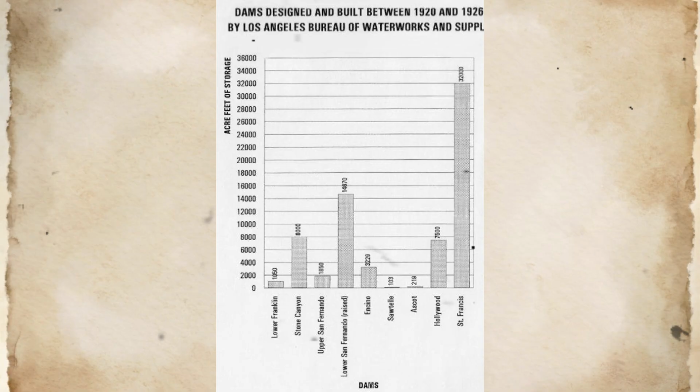The coroner's official count identified 432 confirmed fatalities, but this number was recognized as incomplete because some bodies were never recovered, having been swept out to sea or buried under debris. Demographic analysis and missing person reports suggested that the actual death toll may have exceeded 450.

The majority of fatalities occurred in the upper reaches of San Francisquito Canyon and in isolated ranches and work camps in the Santa Clara Valley, where residents received no warning and had no opportunity to escape. In the towns of Fillmore and Santa Paula, where telephone warnings allowed partial evacuation, casualties were substantially lower but still significant, particularly among those who did not hear the warnings or who were unable to reach high ground in time.

The material damage extended over more than 87 kilometers of valley length from the dam site to the ocean. Approximately 1,200 structures were destroyed, including houses, barns, agricultural buildings, and industrial facilities. Thousands of hectares of agricultural land were scoured or buried under debris. Multiple bridges, sections of highway and railroad infrastructure were destroyed.

The economic cost, estimated at the time as approximately $15 million in 1928 currency, corresponded to several hundred million dollars in present value. However, the economic impact extended beyond direct property damage to include lost agricultural production, costs of emergency response and recovery, and long-term disruption to regional development.

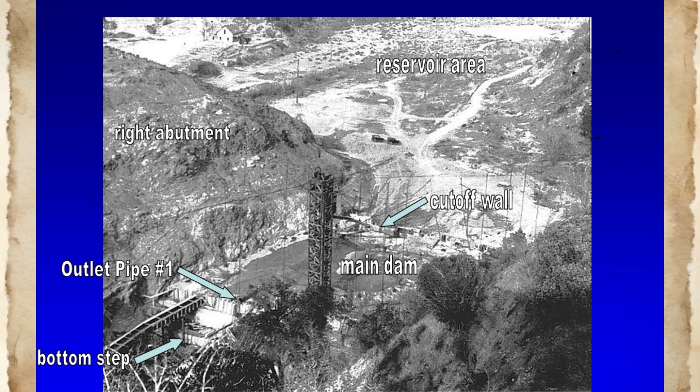A design process that included thorough geological investigation and rigorous stability analysis would have identified the unsuitability of the site or would have resulted in design modifications to address the identified hazards. An organizational culture that encouraged questioning of assumptions and solicitation of external expertise would have created opportunities for alternative interpretations to be considered. An institutional framework that required independent review would have provided a mechanism for identifying deficiencies before construction proceeded. Each of these safeguards was absent at St. Francis, and their collective absence made the failure probable.

The collapse of the St. Francis Dam was not a singular catastrophic event, but rather the terminal phase of a multi-mechanism failure chain in which distinct physical processes interacted, reinforced one another, and ultimately converged to produce total structural failure. Reconstructing this failure chain requires integrating evidence from post-failure site inspections, analysis of the final positions and conditions of dam fragments, examination of foundation surfaces exposed after the flood, laboratory testing of foundation materials, and application of mechanical principles governing dam stability, rock mass behavior, and progressive failure. The objective is to establish a causally complete sequence, to identify each critical link in the chain, to explain how one condition enabled or accelerated the next, and to define the point beyond which recovery was no longer possible.

The failure chain began not on March 12, but weeks earlier, when the reservoir first approached full capacity and water began to saturate foundation materials that had remained unsaturated throughout most of the filling period. The Vasquez conglomerate forming the western abutment and foundation was exposed to sustained wetting for the first time, as the reservoir level rose to spillway elevation. The conglomerate's response to saturation was governed by its mineralogical composition and microstructure. The matrix consisted predominantly of clay minerals, primarily montmorillonite and illite, with minor proportions of quartz, feldspar, and calcite.

For the St. Francis Dam, the differential settlement beneath the western abutment would have induced tensile stresses in the upstream face of the dam in this region, promoting crack propagation from the water face into the interior of the structure. These cracks, once formed, provided pathways for reservoir water to penetrate into the dam. Water pressure within cracks exerts a wedging force that tends to open the cracks further, a phenomenon known as hydraulic fracturing. The progression is self-reinforcing. Settlement causes cracking. Cracking allows water penetration, water pressure widens cracks, and widened cracks facilitate additional settlement by reducing the effective area resisting load.

Simultaneously, with the mechanical degradation of the conglomerate, chemical dissolution of gypsum veins was occurring within the foundation. Gypsum, calcium sulfate dihydrate, has a solubility in water of approximately 2.5 grams per liter at typical groundwater temperatures. This solubility is low compared to highly soluble salts such as halite, but it is sufficient to produce measurable dissolution over timescales of days to weeks when flowing water is in continuous contact with gypsum surfaces. The gypsum veins in the Vasquez conglomerate ranged in thickness from a few millimeters to 2 centimeters and were distributed throughout the formation. As seepage water migrated through the conglomerate, it dissolved gypsum from vein walls, widening the veins and creating interconnected cavities along former vein networks.

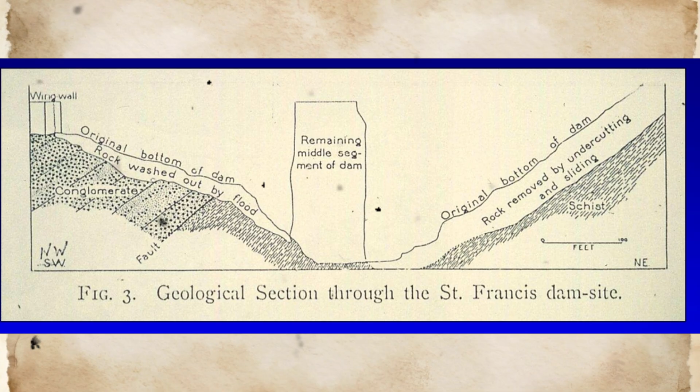The mechanical effect of piping within the conglomerate was a progressive reduction in the effective volume of foundation material supporting the dam. As cavities enlarged, the load previously carried by the material removed was transferred to adjacent intact material, increasing stress concentrations and accelerating deformation. In the limiting case, a sufficiently large cavity or interconnected system of cavities could undermine the foundation entirely, leaving portions of the dam base unsupported. Physical evidence suggests that this condition was approached, if not reached, in localized areas beneath the western wing of the dam prior to final collapse. Fragments of the western wing recovered after the failure exhibited zones of concrete that had been in contact with open voids, indicated by clean, unscarred surfaces with no adhering foundation material.

On the eastern side of the dam, a different set of physical processes was producing foundation instability. The Pelona schist forming the eastern abutment responded to reservoir filling primarily through changes in pore pressure along foliation planes rather than through bulk material degradation, as in the conglomerate. The foliation in the schist consisted of parallel surfaces defined by aligned mica crystals, separated by distances ranging from a few millimeters to several centimeters. These surfaces were inherently weak in shear due to the low friction coefficient of mica minerals, and due to the absence of significant cohesion or interlocking across the smooth foliation planes.

Under dry conditions and with no external loading, the hillside schist was stable because gravitational stresses acting parallel to foliation were less than the available frictional resistance. The impoundment of the reservoir altered this stability balance through two mechanisms.

First, the weight of the dam applied a vertical load to the base of the slope, increasing the shear stress acting on potential slip surfaces extending into the hillside. Second, infiltration of reservoir water into foliation planes elevated pore pressures, reducing effective normal stress and thereby reducing frictional resistance.

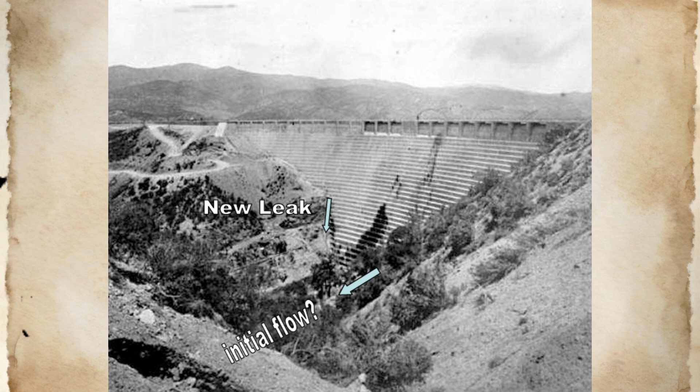The catastrophic phase of failure was initiated by the eastern abutment landslide reaching a critical state of acceleration. Landslides on foliation planes in schist typically exhibit a characteristic failure progression: initial slow creep, followed by accelerating movement as resisting forces are progressively overcome, culminating in rapid runout once a threshold velocity is exceeded and dynamic effects begin to dominate. The transition from slow creep to rapid acceleration can occur over minutes to hours and may be triggered by a specific event such as failure of an intact rock bridge along the slip surface, or a sudden increase in pore pressure due to opening of a previously closed fracture.

For the eastern abutment at St. Francis, this transition occurred at approximately 11:57 p.m. on March 12, as evidenced by the failure of the electrical transmission line at that moment. The rapid movement of the landslide mass subjected the eastern wing of the dam to forces that exceeded its structural capacity within seconds. The concrete blocks forming the eastern wing, already weakened by shrinkage cracks and potentially by tensile fractures induced by earlier slow movements, were thrust downstream and outward.

Eyewitness testimony from Ace Hopewell, who was passing near the dam site at the time of failure, described hearing a deep rumbling sound beginning at approximately 11:57 p.m. This sound was consistent with the fracturing of large concrete blocks and the grinding of concrete fragments against rock surfaces as the eastern wing disintegrated. The breakup of the eastern wing created multiple large fragments, the largest of which, weighing several thousand tons, were carried downstream by the initial surge of water from the breached reservoir.

The tombstone section was founded on schist, but at a lower elevation than the eastern wing, and the foliation orientation beneath the tombstone dipped more steeply into the foundation rather than parallel to the slope surface. This geometry provided greater resistance to sliding than the orientation beneath the eastern wing. Additionally, the tombstone was the only section of the dam provided with foundation drainage in the form of relief wells. These wells, while modest in number and capacity, apparently provided sufficient pressure relief to limit uplift pressures beneath this section to levels that maintained an adequate factor of safety against sliding. The structural integrity of the tombstone concrete, potentially less compromised by shrinkage cracks than the wings, also contributed to its survival.

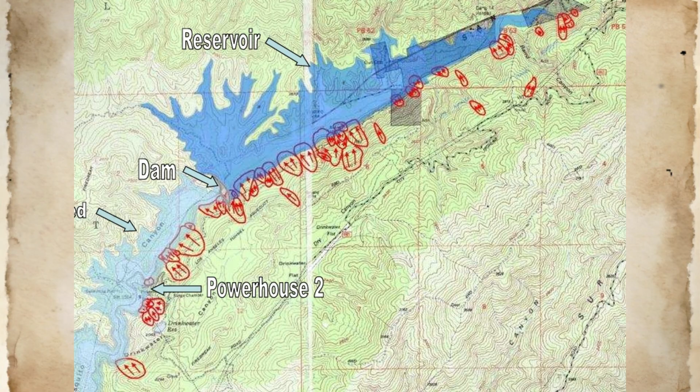The combination of favorable foundation geometry, limited drainage, and structural integrity was sufficient to prevent collapse of this section despite the extreme loading conditions imposed during the progressive failure of the adjacent wings.

The western wing of the dam failed approximately 20 minutes after the eastern wing, based on analysis of floodwave propagation timing and reservoir drawdown rates. This time interval corresponds to the period required for reservoir level to drop sufficiently that hydrodynamic forces on the western wing changed from the static hydrostatic pressure distribution to a dynamic distribution dominated by drawdown-induced pressures.

As water discharged through the eastern breach, the reservoir level adjacent to the western wing dropped rapidly, creating a vertical pressure gradient on the upstream face. This gradient induced additional downstream thrust on the structure. Simultaneously, the partial drainage of the reservoir reduced the confining pressure on the saturated conglomerate foundation, allowing it to expand

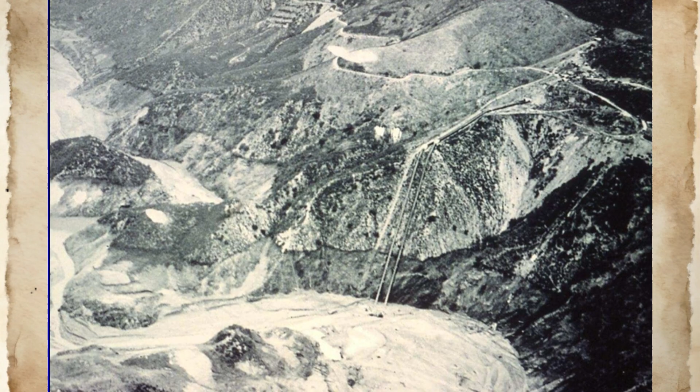The collapse of the western wing created a second major breach approximately 80 meters wide, allowing the remaining reservoir water to discharge through both the eastern and western openings simultaneously. The combined outflow through these two breaches reached peak rates estimated at 14,000 to 16,000 cubic meters per second, flow rates that drained the reservoir to near-empty conditions in approximately 70 minutes from the initial failure.

The erosion of foundation material during the flood discharge was extensive. In the western abutment, approximately 6 meters of conglomerate was removed over an area of several thousand square meters, exposing the underlying schist and fault zone. In the eastern abutment, landslide debris and weathered schist were scoured to depths of 10 to 15 meters, creating a channel substantially below the original valley floor elevation.

The erosive action was concentrated in the first 30 to 40 minutes of discharge, when flow velocities were highest and when the flow was heavily laden with sediment that enhanced its abrasive capacity. As the reservoir level dropped and flow rates decreased, erosion rates diminished correspondingly. By the time the reservoir was nearly empty, erosion had essentially ceased, leaving a stable channel geometry that was documented in post-failure surveys.

The first awareness that a catastrophic failure had occurred came from residents and travelers in San Francisquito Canyon, who heard the initial collapse or who encountered the rapidly advancing flood wave. Ace Hopewell, whose motorcycle journey brought him past the dam site at approximately midnight, heard a deep rumbling noise that he initially attributed to blasting operations at a nearby construction site. Within minutes, he encountered floodwaters on the canyon road and narrowly escaped to higher ground. His subsequent report to authorities provided one of the earliest confirmations that a major disaster was underway.

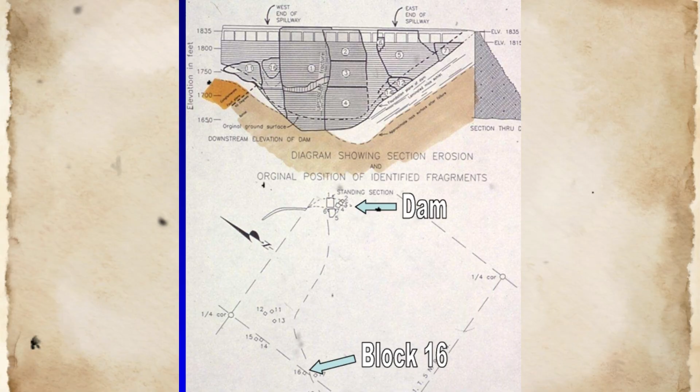Similarly, the power company substation downstream of the dam recorded the failure of electrical transmission lines at 11:57:30 p.m., providing an objective timestamp for the initial structural failure. However, the significance of this electrical fault was not immediately recognized by power company personnel, who initially interpreted it as a routine equipment failure rather than as an indicator of dam collapse.

The first confirmed communication of the dam failure to municipal authorities occurred at approximately 12:30 a.m. on March 13, when a telephone call reached the Los Angeles Bureau of Waterworks and Supply offices reporting that the dam had collapsed and that flood waters were moving down the Santa Clara Valley. This report prompted immediate efforts to warn downstream communities. Telephone operators in Los Angeles began placing calls to police departments, fire departments, and other emergency services in towns along the anticipated flood path. The effectiveness of these warnings varied considerably depending on the time available before flood arrival, the adequacy of local communication infrastructure, and the ability of local authorities to alert residents and facilitate evacuation.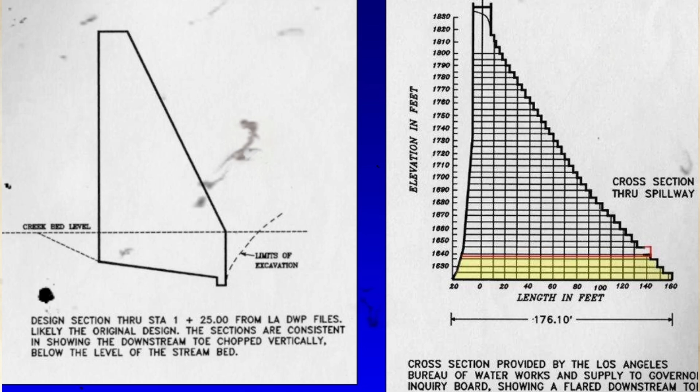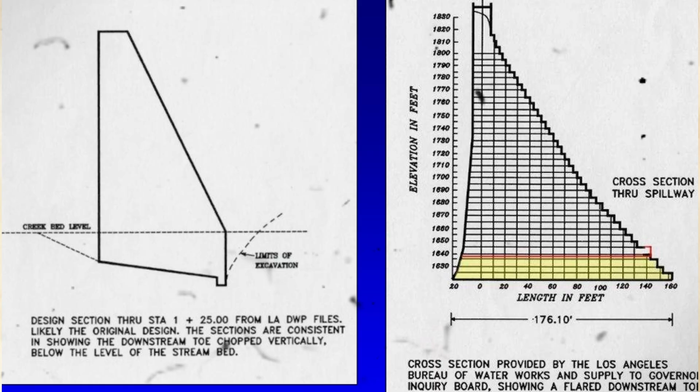The engineering response to the disaster involved multiple parallel investigations conducted by different organizations and jurisdictions. The Los Angeles County coroner convened a formal inquest to determine the cause of death for identified victims and to assess legal responsibility for the disaster. The coroner's jury heard testimony from witnesses, reviewed physical evidence, and received expert opinions from engineers and geologists. The California governor appointed a commission consisting of civil engineers and geologists to investigate the technical causes of the failure and to make recommendations for preventing similar disasters.

The Los Angeles Bureau of Water Works and Supply conducted its own internal investigation. Professional engineering societies, including the American Society of Civil Engineers, assembled independent review panels to examine the failure and to disseminate lessons learned to the broader engineering community. These multiple concurrent investigations produced overlapping but not always consistent findings, reflecting differences in methodology, access to evidence, and interpretive frameworks.

The physical evidence available for forensic analysis consisted of the damaged and partially destroyed dam structure, the scoured foundation surfaces exposed after the flood, displaced blocks of concrete distributed along the canyon, and material samples that could be collected for laboratory testing. Access to the site was complicated initially by residual flooding, unstable debris piles, and ongoing search and rescue operations. Systematic engineering surveys of the site did not begin until several days after the failure, by which time some evidence had been disturbed by rescue activities and by natural weathering.

Nevertheless, the investigation teams were able to document key features, including the final position and orientation of the tombstone section, the locations and dimensions of the eastern and western breaches, the extent of foundation scour, the positions of major displaced concrete blocks, and the characteristics of exposed foundation rock. One of the critical forensic questions was the sequence of failure, specifically whether the eastern or western wing had failed first. This question was significant because the answer would indicate which foundation condition was most critical and which failure mechanism was dominant. Early speculation favored western abutment failure, based on the observation that the conglomerate was obviously weak and that precursor seepage had been concentrated in the western abutment.

If foundation drainage had been provided beneath the full length of the dam, uplift pressures would have been controlled, and factors of safety against sliding would have been higher. If independent technical review by a state agency or external consultants had been required, any of these deficiencies might have been identified and corrected. The absence of these safeguards meant that prevention of failure would have required recognition of the problem and initiation of corrective action during the operational phase specifically.

During the period of reservoir filling when the effects of foundation saturation and increased loading were becoming manifest, the observed increases in seepage, the development of turbidity, and the surging flow pattern on March 12 were symptomatic of progressive failure, but these symptoms were ambiguous and could be rationalized within a conceptual framework that did not include subsurface erosion in rock foundations or landslide reactivation as credible mechanisms. A more conservative interpretation of these warning signs would have prompted reservoir drawdown as a precautionary measure, but such conservatism was not part of the operational culture or the decision-making framework in place at the time.

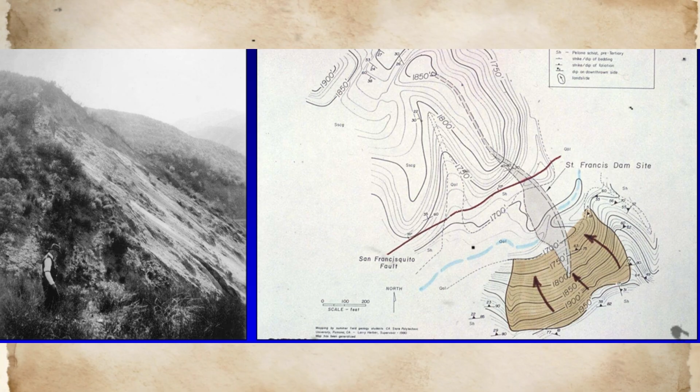The institutional response to the disaster included immediate changes to California's dam safety regulatory framework. Within weeks of the failure, the state legislature began consideration of amendments to eliminate the exemption that had allowed municipal agencies to construct dams without state review. The legislation that ultimately passed in 1929 gave the California Division of Water Resources authority to review and approve all dam designs regardless of ownership, to inspect dams during construction, and to require modifications to existing dams found to be unsafe. This legislation established one of the first comprehensive state-level dam safety programs in the United States and served as a model for similar programs adopted in other states in subsequent years.

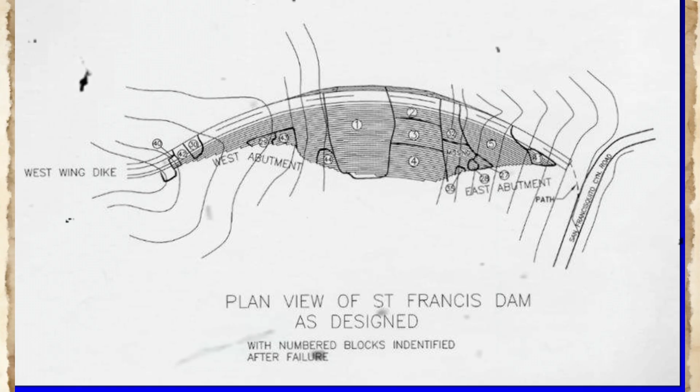Professional engineering practice was also affected by the disaster. The failure prompted increased emphasis on geological site investigation as a mandatory component of dam design. Engineering curricula began to include more extensive treatment of foundation mechanics, soil and rock behavior, and the importance of subsurface exploration. Professional societies developed and disseminated guidelines for dam design that emphasized the need for formal calculations of stability, consideration of uplift pressure, provision of drainage, and inclusion of appropriate factors of safety. The concept of independent technical review, whereby significant projects are subjected to examination by engineers not affiliated with the design team, gained wider acceptance as a means of identifying potential errors or oversights before construction.

The human dimension of the post-failure period was profound and extended far beyond the immediate casualties and property losses. Survivors who had lost family members, homes, or livelihoods faced lengthy processes of recovery and rebuilding. The psychological trauma of the disaster affected not only direct survivors but also rescue workers, investigators, and community members who witnessed the destruction. William Mulholland, who had built his professional reputation on the successful delivery of water infrastructure to Los Angeles, was personally devastated by the failure.

He testified at the coroner's inquest, accepting full responsibility for the disaster and stating that no blame should attach to any other person. He resigned from his position at the Bureau shortly afterward and lived in relative seclusion until his death in 1935. His legacy remains complex. He is remembered both as the visionary engineer who made possible the growth of Los Angeles through the construction of the aqueduct system, and as the engineer whose errors led to one of the deadliest civil engineering disasters in American history.

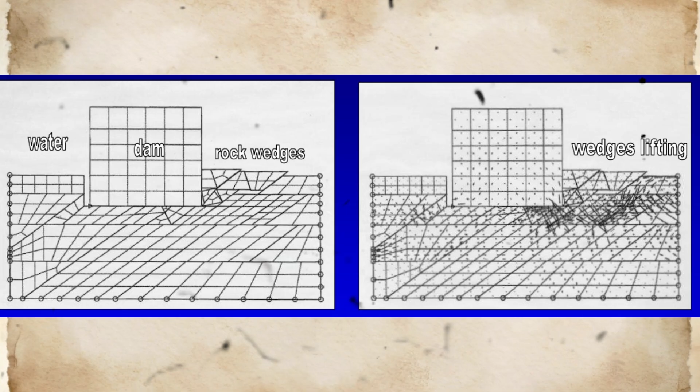The forensic investigations collectively identified multiple contributing factors, but did not reach unanimous agreement on the relative importance of different factors or on the precise sequence of events. The California Governor's Commission concluded that the failure was due primarily to defects in the foundation, specifically citing the weakness of the conglomerate and the presence of ancient landslides in the schist. The coroner's jury reached a similar conclusion, but added that there had been an error in engineering judgment in the design and construction of the dam.

Professional engineering panels emphasized the absence of adequate foundation investigation, the inadequacy of drainage provisions, and the failure to perform rigorous stability calculations. All investigations agreed that the disaster was preventable, and that it resulted from a combination of geological unsuitability of the site and engineering deficiencies in design and construction.

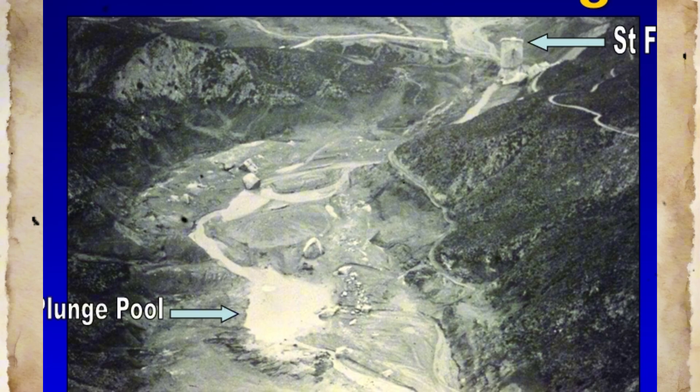One of the persistent uncertainties that remained after the investigations was the question of whether the dam could have survived if only one of the two abutment problems, the conglomerate weakness or the schist instability, had been present without the other. This counterfactual analysis is inherently speculative, but is relevant to understanding which failure mechanism was most critical. If the eastern abutment had been stable, would the progressive yielding of the conglomerate foundation alone have caused collapse, or would the dam have simply settled and deformed without total failure? If the conglomerate had been competent, would the eastern abutment landslide alone have caused collapse?

The evidence suggests that either condition alone might have been manageable, particularly if adequate drainage had been provided to control uplift pressures. However, the combination of both conditions, along with the absence of drainage, the inadequate structural proportions, and the monolithic construction without joints, created a configuration in which failure was highly probable and ultimately inevitable.

The secondary crisis of assessing the safety of other existing dams and water structures in California and nationwide was addressed through systematic inspection programs initiated by state and federal agencies in the years following the St. Francis failure. These inspections identified numerous dams with deficiencies similar to those at St. Francis: inadequate foundation investigation, insufficient drainage, lack of formal stability calculations, and absence of independent review.

The economic costs of the disaster extended beyond the direct property damage and loss of life. The city of Los Angeles faced claims for damages totaling many millions of dollars, filed by survivors and by the estates of deceased victims. The legal proceedings extended over several years and ultimately resulted in settlements totaling approximately $15 million in 1928 currency, equivalent to several hundred million dollars in present value. The financial burden was borne by Los Angeles taxpayers through bond issues and rate increases.

The reputational damage to the city and to the Los Angeles Bureau of Water Works and Supply was significant and long-lasting, affecting public confidence in municipal water infrastructure and in the competence of public agencies to manage large-scale engineering projects.

The St. Francis Dam site itself was not redeveloped as a dam location. The surviving fragments of the dam, the tombstone section and portions of the western wing wall, were demolished in 1929 to remove hazards and to prevent their presence from serving as a memorial to the disaster. The reservoir basin reverted to natural drainage, and the area remained largely undeveloped for decades.

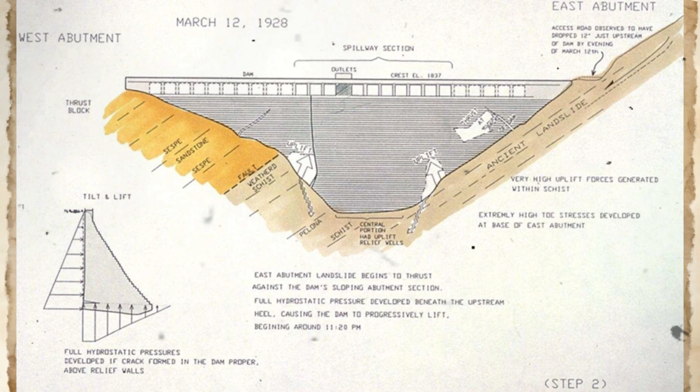In subsequent years, the site has been recognized as historically significant, and efforts have been made to preserve the remaining evidence of the dam and to interpret the disaster for educational purposes. The location is now accessible to visitors and serves as a sobering reminder of the consequences of engineering failure.

The question of what could be known in the immediate aftermath of the failure versus what could only be determined through extended forensic investigation is central to understanding the stabilization and recovery period. In the first hours after collapse, observers could see that the dam had failed catastrophically, that both abutments had been involved, and that the reservoir had drained completely. They could not determine the sequence of failure, the specific mechanisms that had initiated collapse, or the relative contributions of different factors.

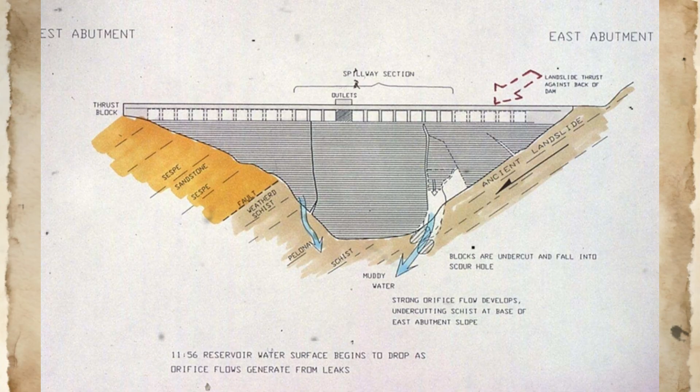These determinations required systematic investigation, geological mapping of the abutments, laboratory testing of foundation materials, structural analysis of the dam proportions, and reconstruction of the sequence based on physical evidence and witness testimony. The investigations took months to complete, and their conclusions were debated for years afterward, reflecting the inherent difficulty of reconstructing complex failure sequences from post-event evidence.